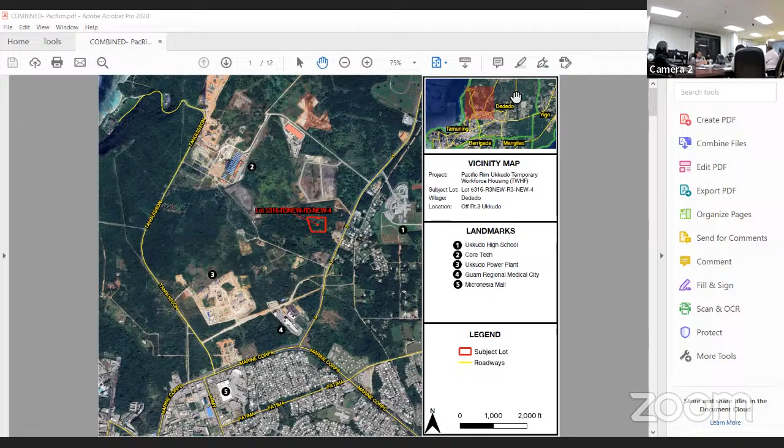It's rare that we convene a hybrid commission for a temporary workforce housing facility, I think this is the first one. Having worked with all of you so much, I feel a little guilty bringing you away from your daily duties, and in bad weather too. Maybe this is an indication that with today's escalating costs, the $3 million threshold is a little too low to convene a hybrid commission in the future. Maybe it ought to be 5 million or more. If you have any thoughts or agree with that, let me know, and I'll do the legwork on a new bill.

Pacific Rim Constructors is a very successful local construction company, founded in 2012, currently with about 250 employees, about half of which are local hire. They've been involved in several notable projects, such as the Villa Sirena, Ironwood Villas, a number of Guam infrastructure projects, and of course projects in both the capital office and in the station.

Due to both recent awards and the prospect of more on the way, Keith and his company have decided to expand their workforce housing facility arrangements so they're ready when needed. The highlights of their proposal, maybe this is one reason it goes over the $3 million threshold, is instead of one or two big warehouse facilities infilled with workforce housing amenities, it will be 6 structures, each accommodating up to 100 workforce employees each. So we have six structures.

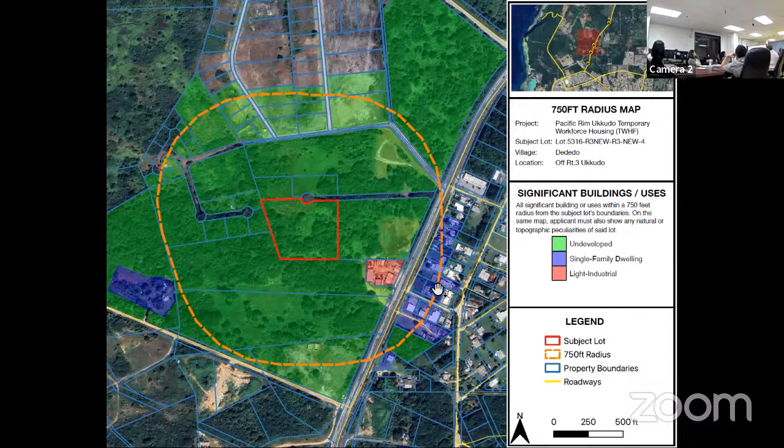Then as for the site plan itself, in your supplemental application 3, you'll see we have six warehouses - one, two, three, four, five, six. A large roadway coming in through the middle, and a cul-de-sac to turn around and get on it. We have basketball courts, four of them there.

Lots of amenities over this side - benches, barbecue areas, picnic tables, a visitor center, and landscaping around, which is required. The river area around it is also required.

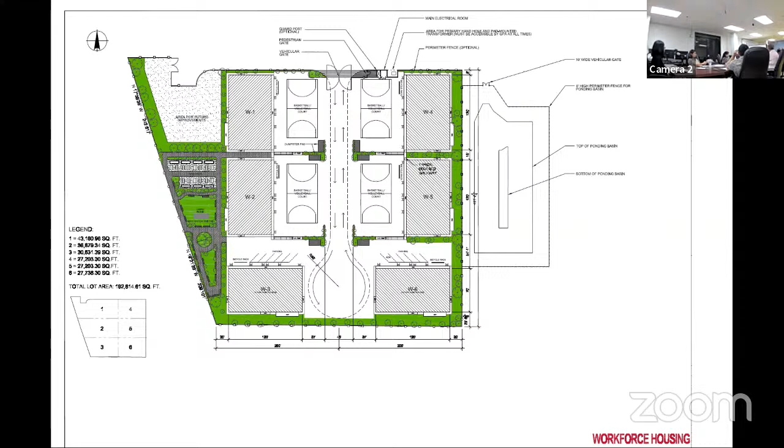Inside, we have the typical amenities that have evolved during this commission's approval of workforce housing facilities over the last 10 years - lots of recreation stuff, pool tables, ping pong tables, internet cafes, quiet rooms, a little medical clinic, and security out front. So it's pretty well accommodated, frankly, and very modern as far as all of them go.

That's it for me. Happy to take your questions.

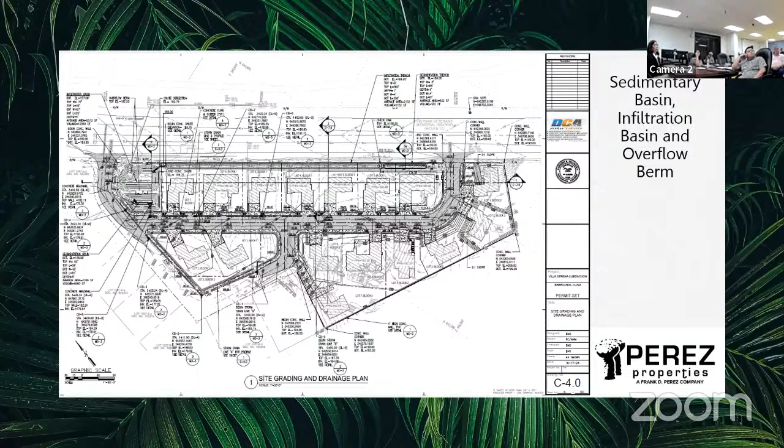The curb and gutter sidewalk were realigned, removing the grassy strip between the sidewalk and the curb. The curb was changed to an S type, and two homes were swapped on two different lots to accommodate setbacks due to an increase in our home size.

One or more solar street poles will be added to replace a total of 16 electric bollard lights located on each home lot, making the subdivision more sustainable. You can see the bollard in front of each home right now.

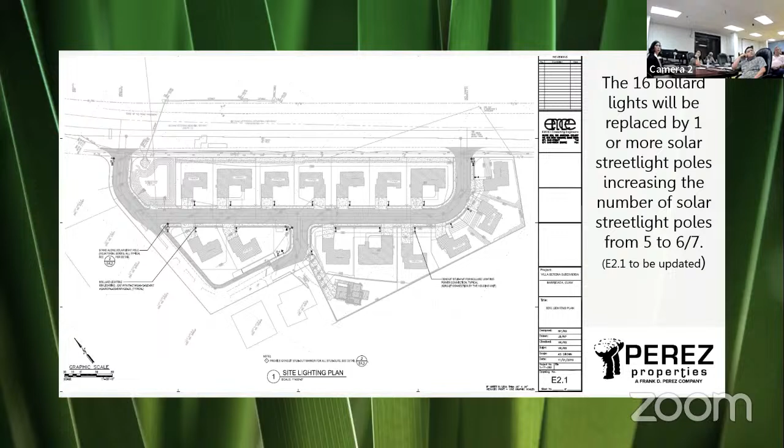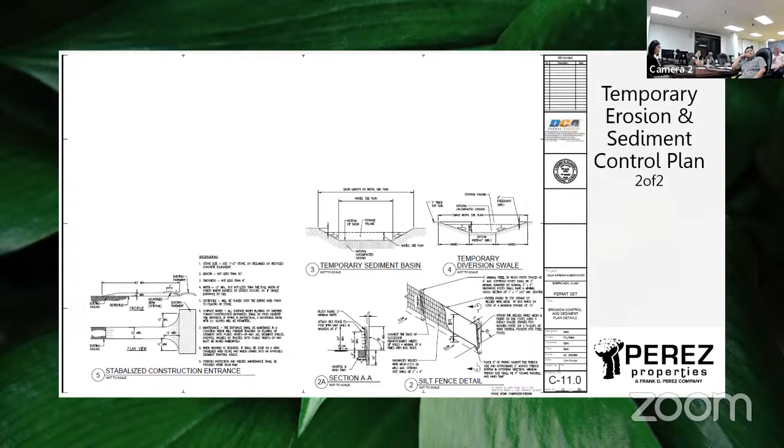A temporary erosion and sediment control plan was added and will be used during construction. These are more details on that erosion plan. Sorry if I'm going too fast.

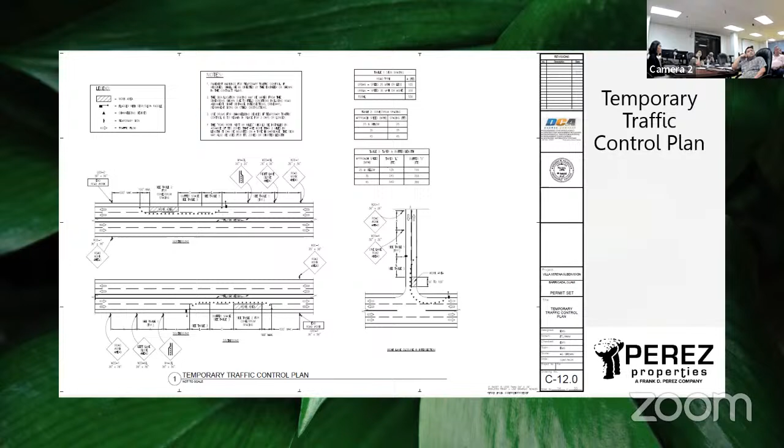A temporary traffic control plan was added as well to be used during the construction phase. For those solicited quotes from contractors, we expect the revised quotes to cover the Tract 18208 block and lot numbers, which were incorporated into the infrastructure plan as well.

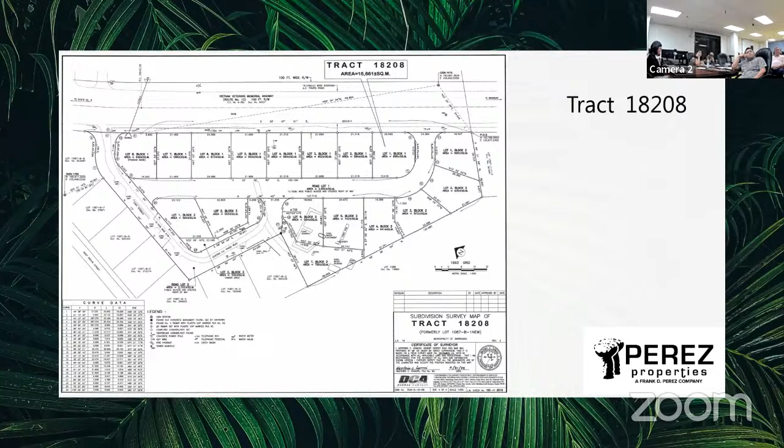Lastly, the subdivision name spelling Villa Sirena with an I was changed to Villa Sirena with an E. That concludes our presentation. Thank you for your consideration.

Thank you very much. To my fellow commissioners, do you have any questions? No questions. So I do have a question. Why did it change from I to E?

Well, Villa Sirena is the name. Sirena is a saint, which was our mother's confirmation name. So when we realized that, we decided we need to change it to this spelling. This subdivision was originally called Villa Farming back in 1958 by our dad, but because there's another Villa Farming in Germany, we changed it to Sirena in her honor.

Okay, thank you for that history. Very good. Now I turn it over to Chief Planner Cruz or staff to make a presentation.

Thank you, Madam Chair. I'll be reading the commission brief on behalf of the case planner, Grace Vergara. This is dated November 7, 2024 for application number 2021-29A. Perez Properties, Inc. is requesting an extension of time for an approved tentative subdivision on Tract 18208, as conditionally approved by the Commission on October 26, 2023. The application pertains to a tentative subdivision aimed at creating 16 single-family residential lots with complete improvements.

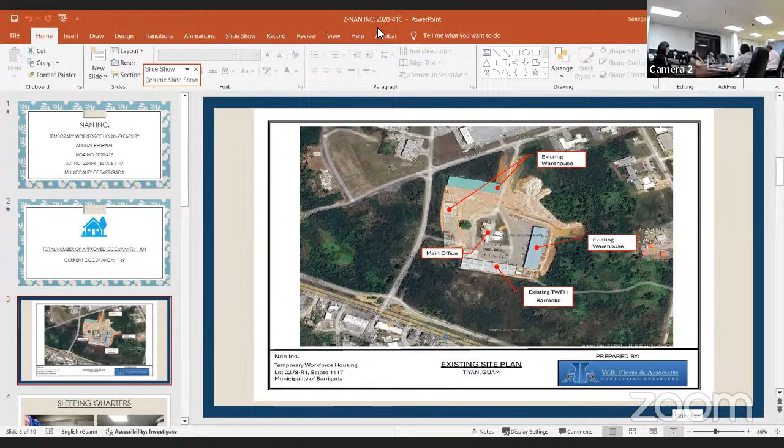So welcome, Mr. Flores, and additional representative. For the record, please state your name and you may proceed. Thank you, Madam Chair and commission members and DLM planning staff. My name is Willie Flores, and we are here on behalf of Nan Inc. With me is Nina Rojas, she's a project manager, and she's very, very shy.

With the possibility of expanding to 852 beds, with conditions. Those conditions require, of course, that we come again before the agencies and the land use commission. We have current occupancy of 170 beds.

I don't know if you wanted to go through this PowerPoint. If not, we can just come right through this, Madam Chair. I believe that there's some time constraints that we're dealing with.

Okay, so current occupancy, the current approvals are for 404 beds. Current occupancy is 170. We anticipate that by the second quarter of 2025, it'll be up to 320 beds.

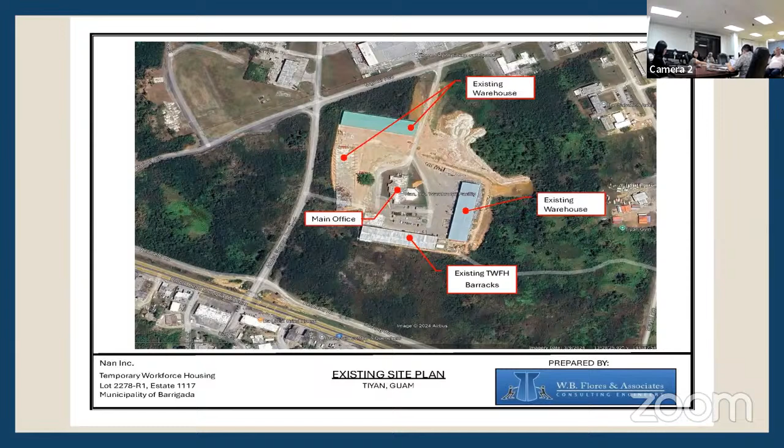The facilities are in excellent condition. Many benefits are provided for the occupants, including recreational facilities. They have table tennis, billiards, volleyball and basketball courts.

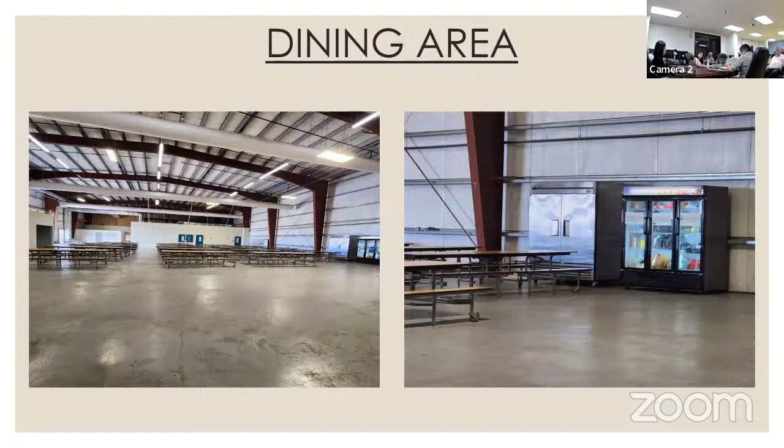They also have transportation for shopping and church transportation. And our favorite is they have karaoke every night for the occupants. And some of those guys can really sing.

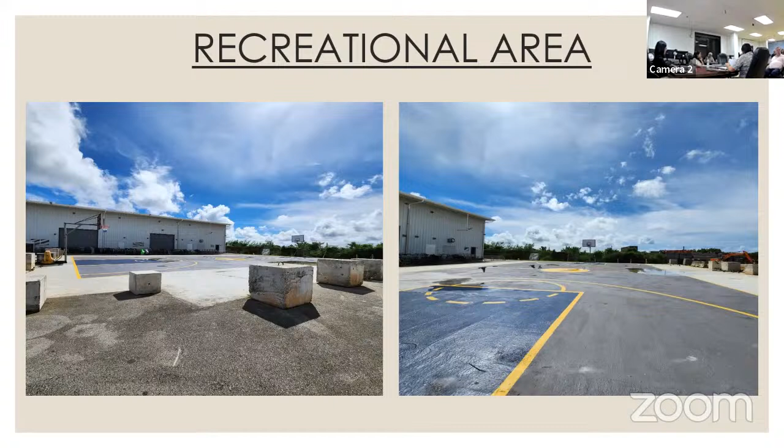It's good all around. We have noticed that the morale at the camp is good and disciplined.

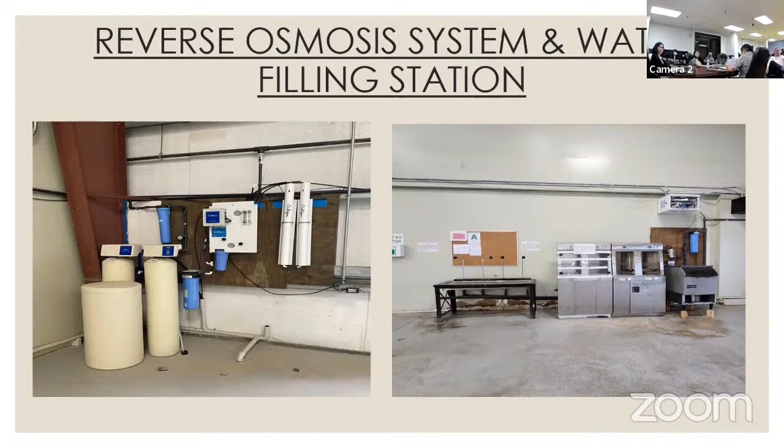They have had 3 employees removed from the facility and sent back home since camp opened for violating rules of conduct. One was for fighting, and the others were caught with alcohol. As you know, these are supposed to be alcohol-free facilities. Generally, most of the occupants abide by the rules.

No other issues that we have noted arose during this period, and so we are here on behalf of Nan Inc. asking if their permit to operate the temporary workforce facility can be renewed once again.

Thank you. Mr. Samasi, Mr. Flores, to my colleagues, do you have any questions?

And now turn it over to Chief Planner Cruz, or staff, for the presentation. Thank you, Madam Chair. This is the Commission brief dated November 4th, 2024 for Nan Inc., who's requesting a renewal of a conditional use permit for the continued operation of a TWFH to house up to 852 workers on lot 2278-R1 in Barrigada in an M1 zone.

The applicant submits its second annual renewal request and in general provides that as approved, elements of the approved TWFH for sleeping, kitchen, dining, toilet, shower, and laundry facilities, security including fire and medical emergency response capability, recreational facilities, transportation services, on-site stormwater retention system, landscaping, a 6-foot high perimeter fence, and an in-house set of rules and regulations of the approved TWFH are functionally existing.

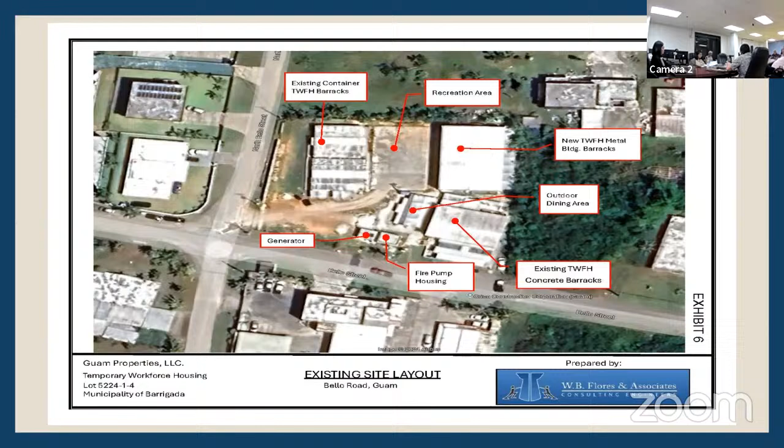The facility is generally well kept. The good thing about them is that they respond immediately when we bring up concerns. I was hoping the Barrigada mayor would stay here because she's aware of the one major issue that arose, which was the placement of the trash bin. A couple of the neighbors were very concerned about where the trash bin was placed, so we had them relocate it to a more remote area, and that has been resolved.

No other issues regarding violations of the workforce rules or violations of law regarding the workforce housing have been brought to our attention. They have the annual sanitary and other operating permits that they've been using. They did have some housekeeping issues, but we've taken care of that. Those housekeeping issues arose after Typhoon Mawar when everybody was out scrambling, trying to recover from the typhoon. But as you can see, they've taken care of that, and the facility is now pretty well cleaned and maintained.

Again, this facility houses employees from both PFM Vertex, which is a Guam-based construction company, and Hensel Phelps, which is an international employer. We would be glad to answer any questions you have at this time, but we are not embarrassed to recommend that, despite their growing pains, we apply for this renewal on their behalf. They're actually good stewards and good contributing members to the community. We did poll some of the neighbors, and they did say that after the initial growing pains, they're doing okay now, so we're okay with that.